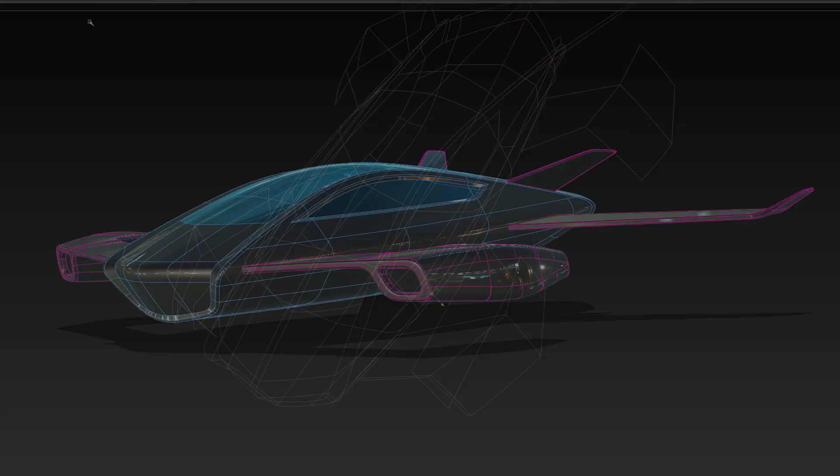This is part 2 of the spaceship. I broke it up into 2 parts because this second part is a little mini version of what I did to make the first initial form.

So as you see here, I'm doing the same thing I did last time. I'm developing a curve network to help me figure out how that turbine is going to look, and what type of proportions I'll have. Actually, before this, I had another video where I tried another method.

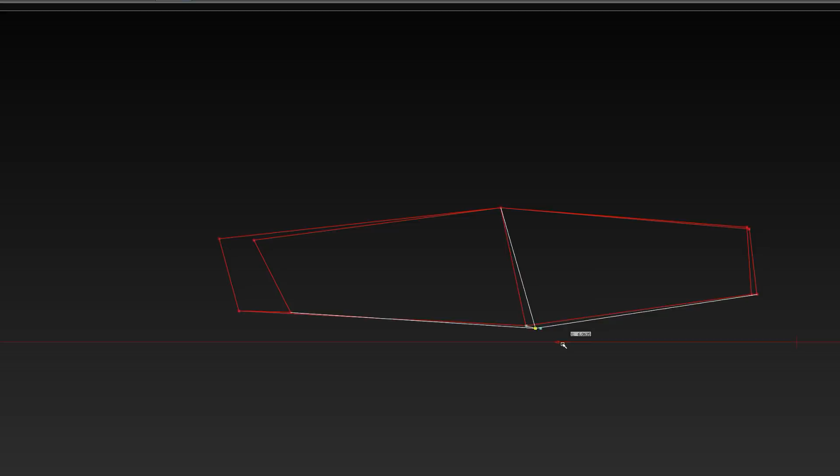Trying to build these turbines off of those wheel wells, I didn't really like just straight up surfacing it, it was kind of confusing me. It reminds me that every time I veer off my method, I always end up going back to how I'm comfortable modeling.

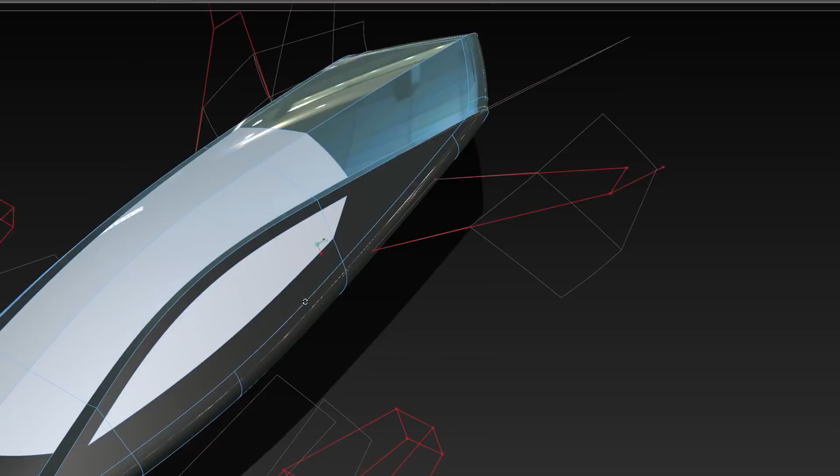Obviously we all have different ways of approaching this. I always try to tell people, because I've seen people model beautiful things in completely different methods, that if you find more comfort doing it another way, it's fine, as long as the result is really controlled.

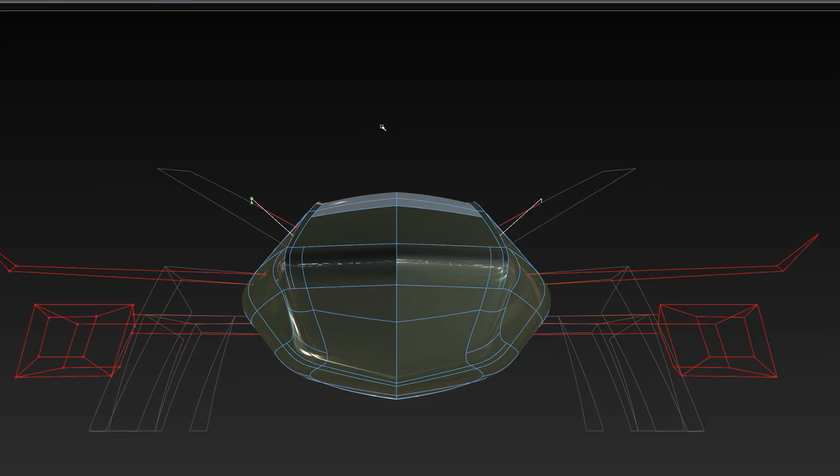It doesn't matter how much twist it has or anything like that. It matters more that you decided where to twist it and what type of volumes you wanted. If you have a better technique than mine, make a video and link it to me. My point is I don't think this is the best method, just my method, something I feel comfortable doing, and it's been really helpful in my career.

So just remember, I don't really like... sometimes I hear people, especially in my career, when guys were teaching me their ways, a lot of times people get a little too egotistical in that sense.

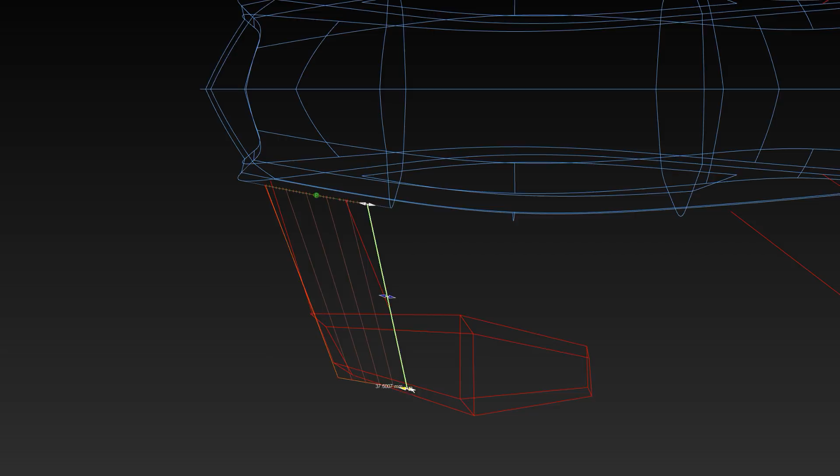They're always like, oh, you have to do it like that, you have to do it like this. I know I might have even sounded like that in my videos, but I want to make it clear that it's not so much about my own method. It's more about trying to tell you guys about control.

That's why I always tell you there are millions of different tools and techniques, because just don't be lazy about how you're modeling. Make sure that whatever technique you're using, you have ultimate control over it.

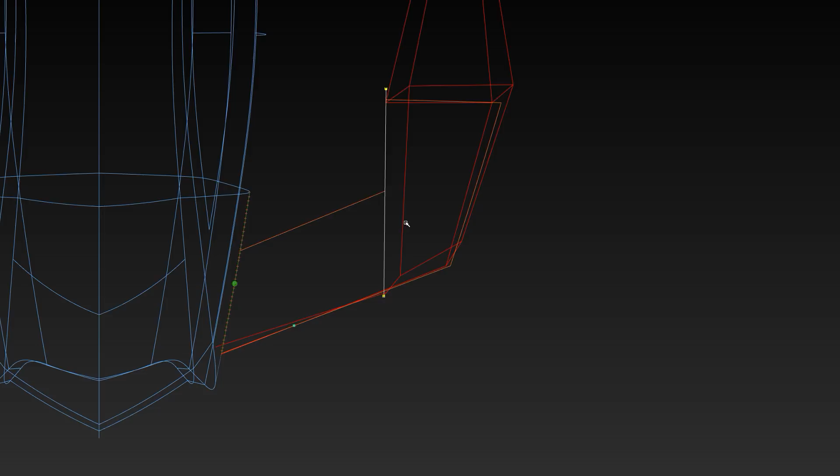My technique is a certain... I don't know, I think you would call it box modeling, or back in the day they used to call it the European method, because it used to be very... before Americans didn't... I don't know, that was before my era.

I will say this technique isn't mine or anything new. It's just something I learned through different coworkers, and it's something I really enjoyed. It's helped me with the companies I worked for, they really liked my results, and my clients like my results too. So in the end, it's all about control.

So here I'm going to slow it down so we can see. While I was modeling it, here's me kind of rotating it around and seeing if I like the design. Again, remember from the previous video, these are all just suggestions to help me figure out how those surfaces are going to be surfaced.

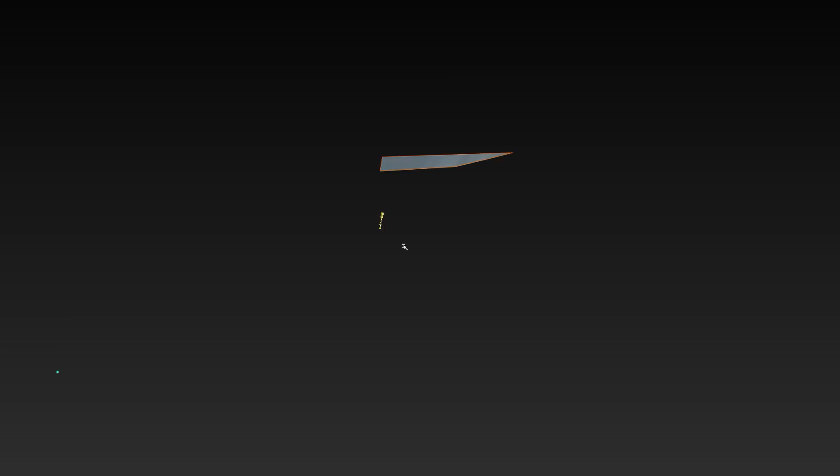Okay, so now I actually start surfacing it. The first thing I do is add a curve on surface using the insert tool, then duplicate it using the duplicate curve tool, and then skin those two together. That's how I extract a surface from my wing.

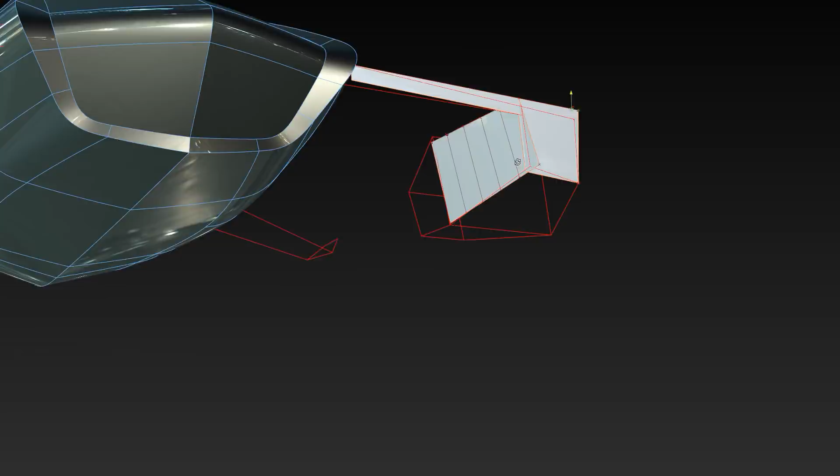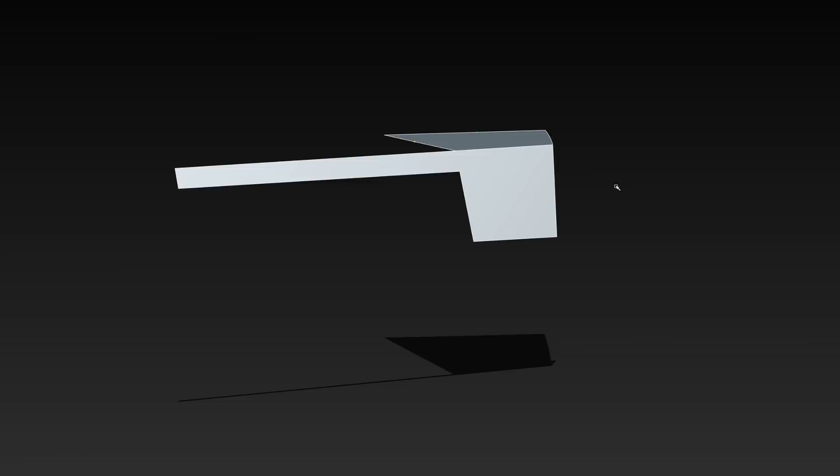From there I go to the top view and extend everything back to get the profile I wanted. Again, this is me trying to find a solid base before doing all the extra stuff I want to do. I extend that plane all the way back, even though I know there's going to be an elevation change later, which you'll see in the design. At this point I had that idea anyway, but I still needed a very solid base to start with.

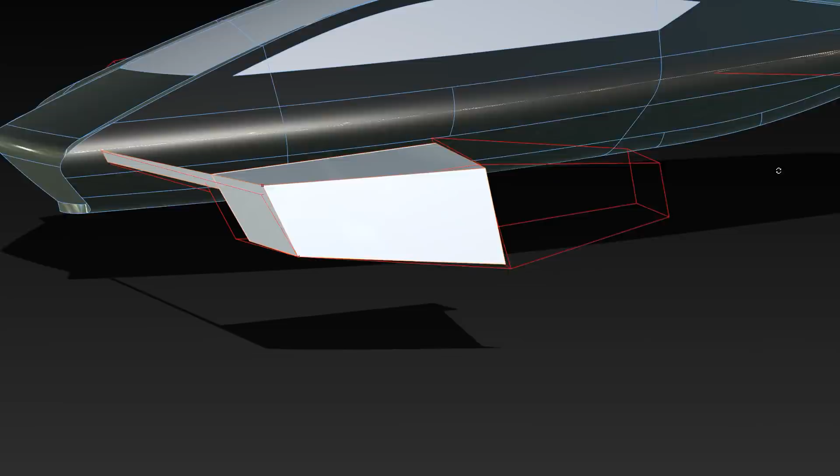Once I have that solid plane, I project the curves and trim them, and this gives me a nice top surface to work with. Now I want to make the front of that turbine, so I use my rail tool to get a nice straight surface right there.

As you see here, I start to add the main surface, and then I start adding the curve on surfaces using my insert tool. I always use the insert curve on surface command because it inserts a curve based on the actual surface's properties, giving you a really nice, clean, balanced cut.

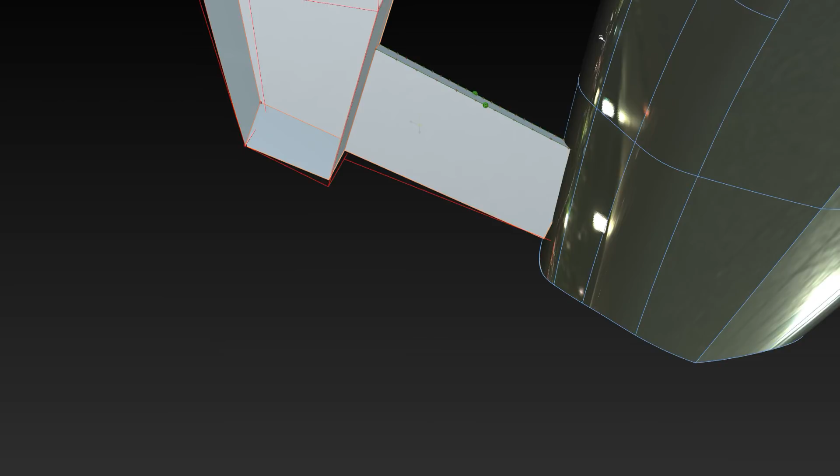But obviously, when the angles are too different, you could use a curve or something else to make that cut. Here, I'm extending the curve on surface to get that corner, and then I duplicate that edge, and then duplicate that curve and place it back on that edge, and then skin it.

Even though I know that seemed a little complicated, there's probably easier ways to do it. I was kind of just going almost like a robot mode, trying to surface this as quickly as possible.

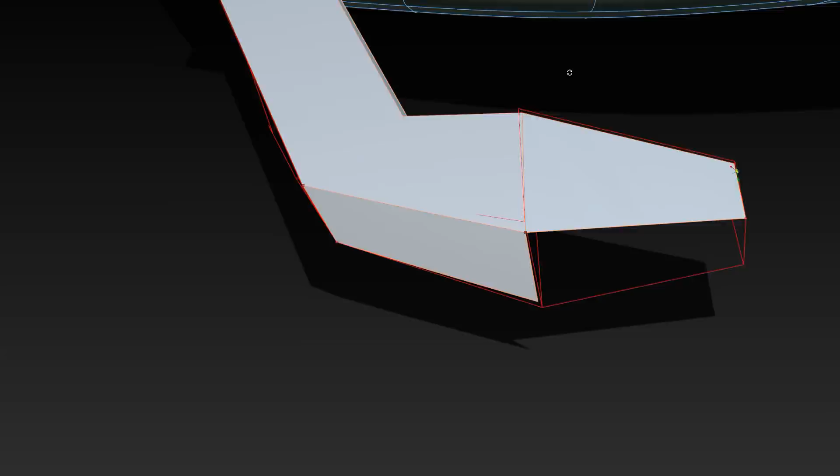Using proper theory. And the speed I'm doing this at, it's actually fairly confusing, honestly - just making those structures in space and trying to figure out what angle is gonna hit it, and doing a bunch of untrimming, retrimming.

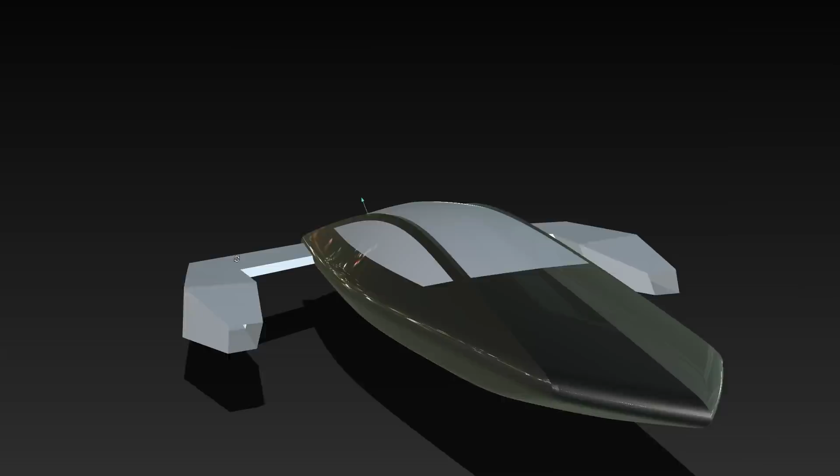Whenever I'm up against these sort of projects or this sort of workflow, I go through it in my head, even though it's happening kind of quickly while I'm actually doing it. I just try to go as simple as possible.

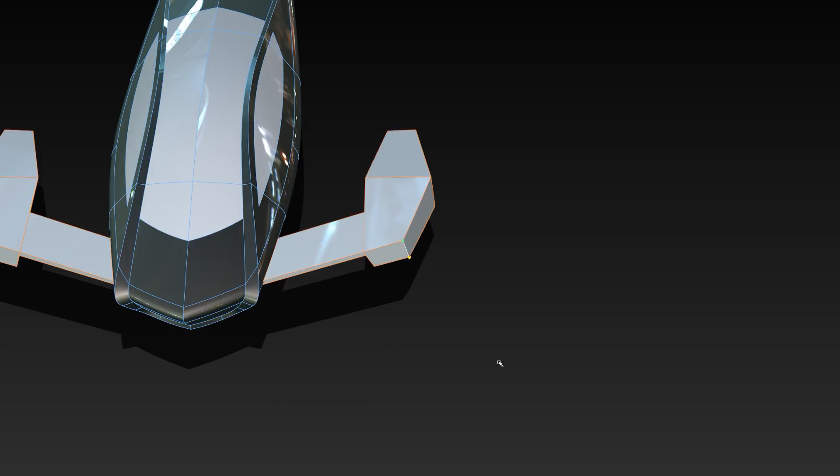Here I'm just railing it. I'm like, okay, let's just rail this, and I know I have to do that because if you start thinking of it in bigger terms, you almost get overwhelmed - it's kind of difficult to figure out that whole structure in your head.

So here now I have a base, and if you see me just browsing around, I'm thinking, okay, what should I do? I'm trying to develop the underside of that connecting arm, and I'm always trying to find a way to use the surfaces to complete the other surfaces.

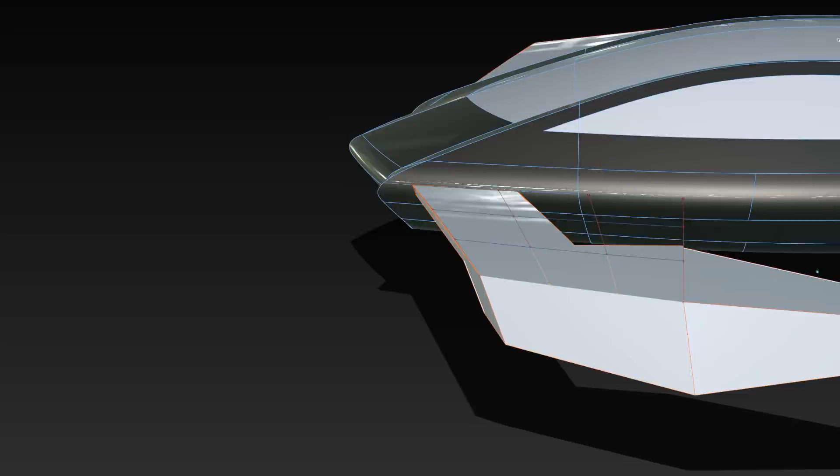So I insert a curve on surface in that slab, and then I rail it using the profile of the other slab. Now I extend it back to match the profile that I wanted.

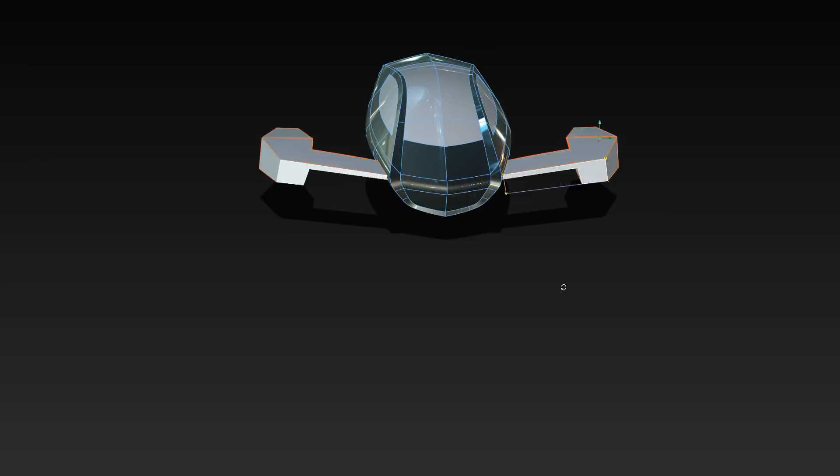If you notice, especially when I'm working on things that are a bit more technical, like this turbine, I'm keeping everything really straight and adding no volume yet, because I'm trying to figure things out first - even though I know it's going to cause me more work later when I'm adding volumes everywhere and realigning everything.

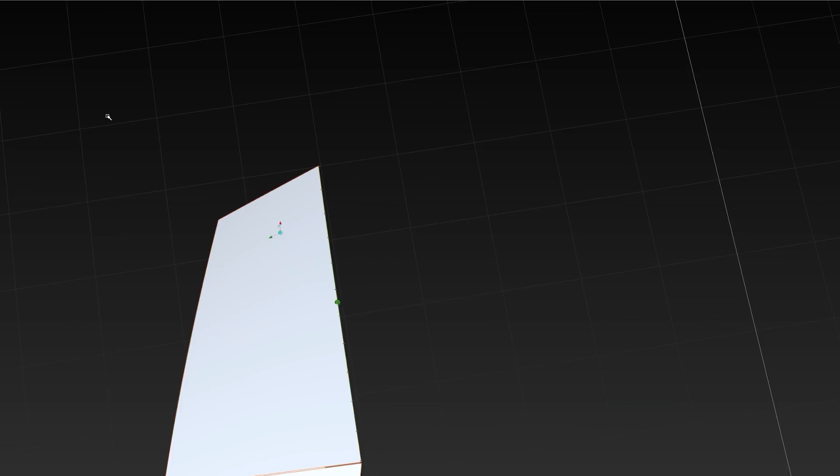But it's a bit confusing, so I'm just trying to get the simplest squared-up form I can get. And here I kind of accomplished that. Now that you have this surfaced up and built, it looks simpler.

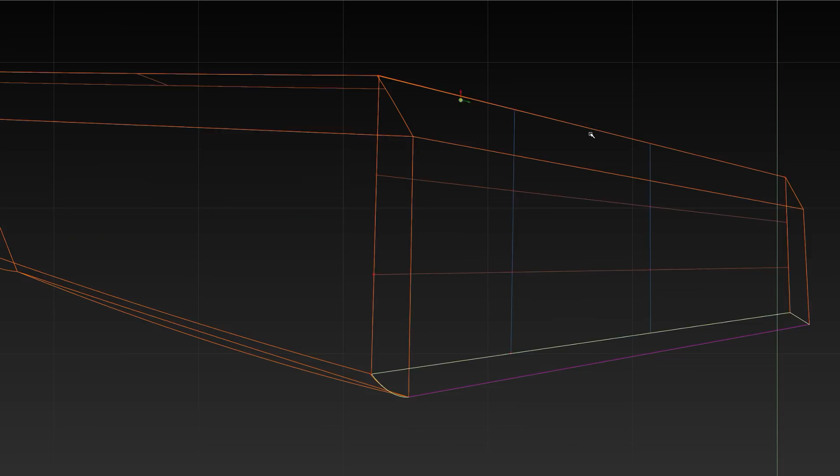It's like, oh yeah, that makes sense. But it looks like that now, and as you saw how we were building it, it's confusing just to get this part down. So don't be too discouraged when you're confused, because I've been doing this all my life, and it's not that I'm not confused, it's always a difficult puzzle to solve.

That's another thing about when I see these videos - they're teaching you the final result, not how they actually got there. So now that I'm actually happy with this form, I'm going to start adding volume to it.

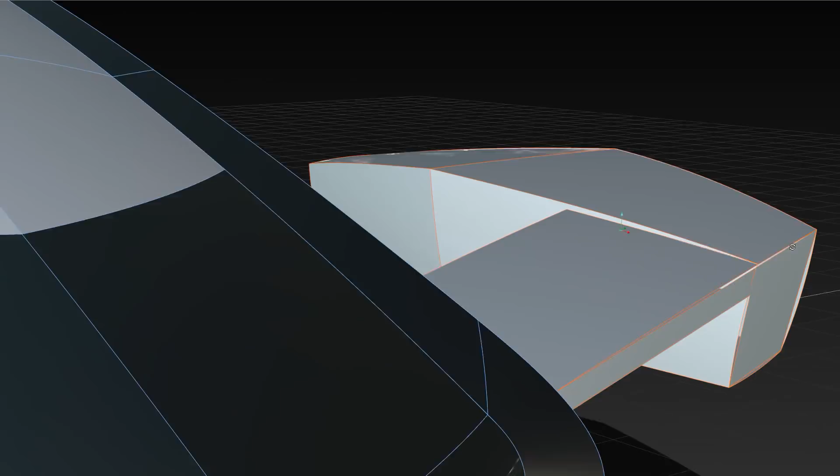I don't know if you remember in the first video, part one, when I was doing the curve network, I talked about how I use the same theory throughout my whole process. Before I was using it for curves, right? Like finding the curve in space and then adding the volume. This is the same exact thought process, but adding one more dimension to it with the surfaces.

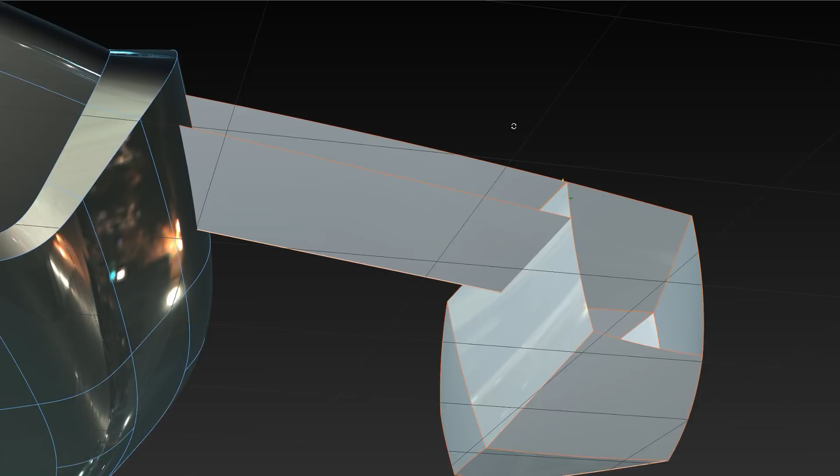First I found this very boxed up primitive form, and now I'm going to start adding the volumes everywhere. This is going to cause a lot of work in general, because since I know it's closed up, every time I add volume to one side, I know that I'm opening up another, and I have to figure out how to add volume to that. I have to add volume to all of them. It might seem repetitive, but honestly, to me, it's just how you get ultimate control over everything.

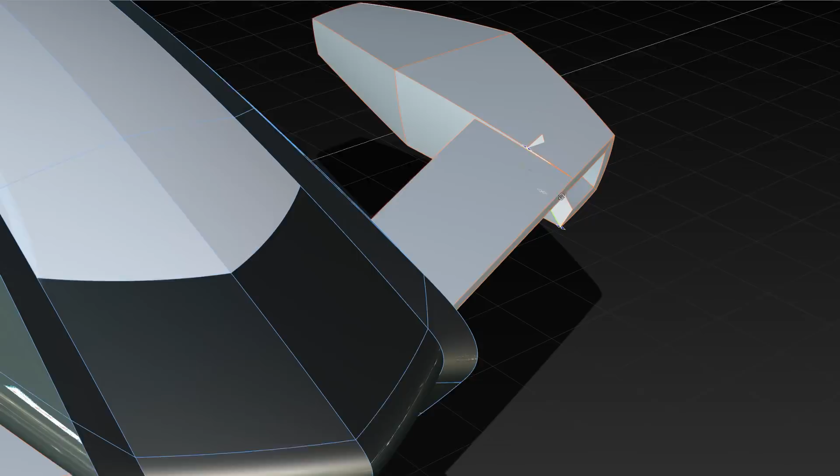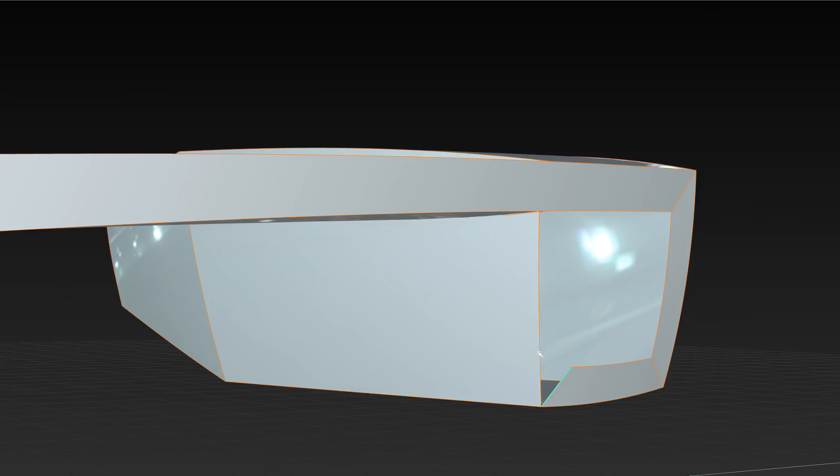Before I was a NURB modeler, I was also a polygon modeler. I personally love polygon modeling, but it doesn't give you this sort of control. Even with all the new solutions coming out, like T-spline based solutions, Speedform and stuff like that, what happens is they make it easier for people to make sort of round organic shapes, but they lack any real control. So to me, they're not really. Every time I'm testing these softwares, they never have the same control that NURB modeling has in general.

That's always NURB modeling, it's the way you can find ultimate fidelity in your models. It's not only Alias, there's other solutions. But when you compare it to polygon modeling or anything like that, yeah, this does seem like a slower method, but nothing is going to give you as much control.

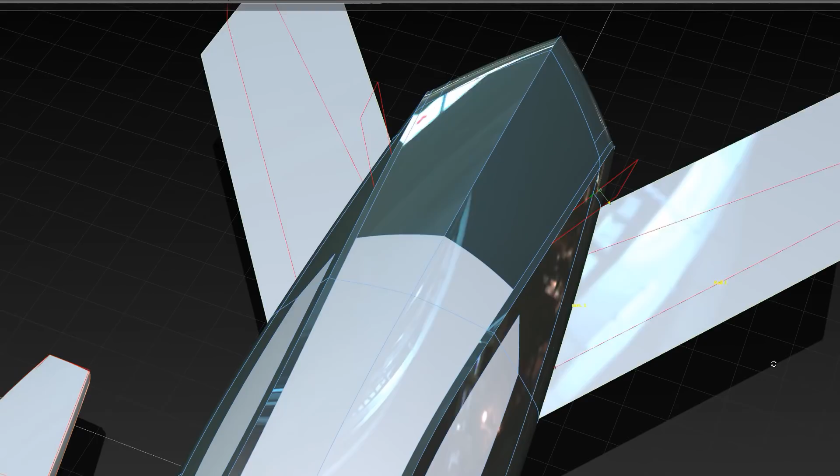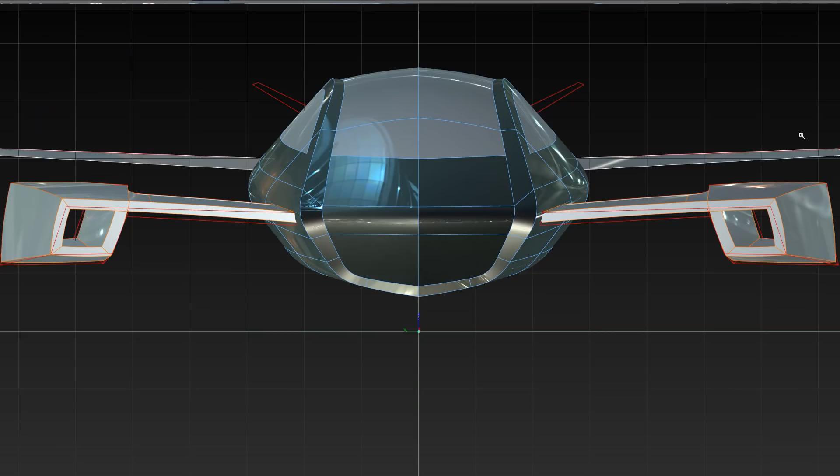If there was anything that could give you more control, one, I would love to see it, and secondly, I would move over to it, because I'm not evangelical for NURB modeling, I'm evangelical for great surface and modeling control. So if there's a new method, I'll definitely look it up. But so far, that's the reason why automotive design studios use it, and why high-end product firms use it too.

So focusing back on the model, it's all kind of been the same. The only thing that's been a little different is I railed that edge of the turbine across. Actually, I was planning on having that turbine, after it turns, go back, sort of like how I'm doing it there. But then later I got bored of it, I didn't like how it looked. It kind of looked weak, seeing how it doesn't really look good.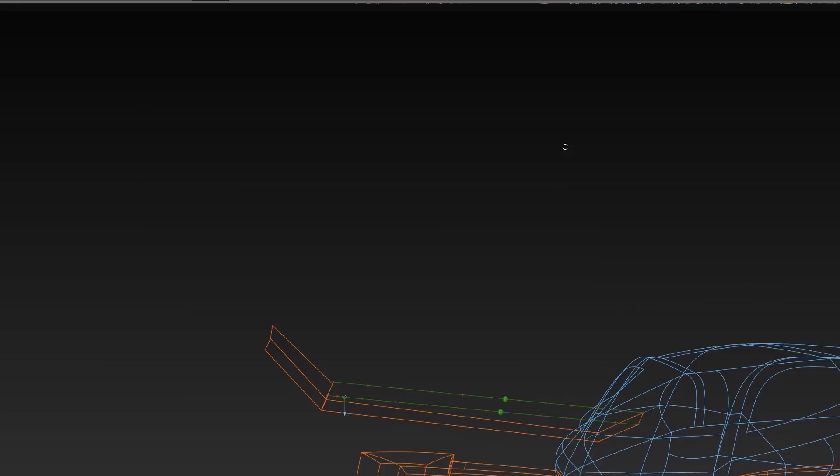So I actually go back to using one main slab for those surfaces. Here I'm using the same method I used, if you guys had seen my Electro video, where I use the railing tool to develop the edge of a surface. Later in the video, you're going to see that I use one surface instead. But there's pros and cons to all that, right? If you use one surface, you can't really change those angles. And even though in the front I do that, in the back you'll see how I use more this method.

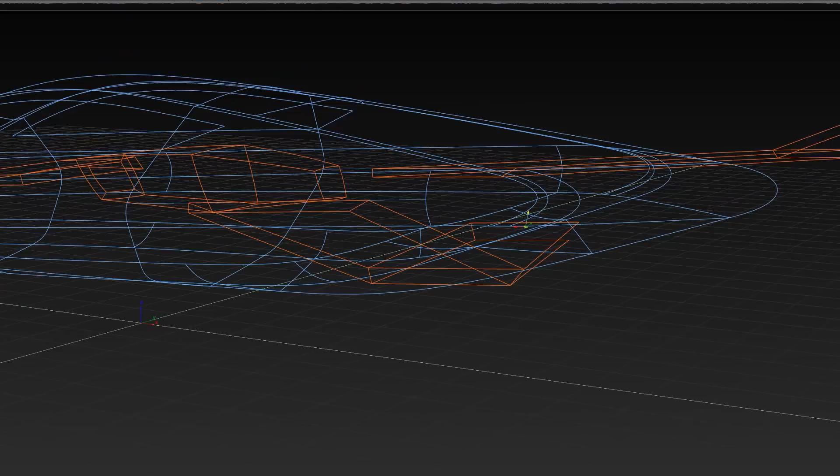Here I'm just trimming it, and then I'm using my freeform blend, and then the side I make it positional, because when I added different volumes to the connector and to the turbine, I knew I wanted this little light catcher.

Once I had the volumes boxed in for the turbine, I went for the rear wing. So here I insert a curve on surface, and then I align that curve I made to it, and then I just do a simple rail. And then I go into the top view and I project the curves I initially wanted, and then I use the trim convert tool to get me that surface.

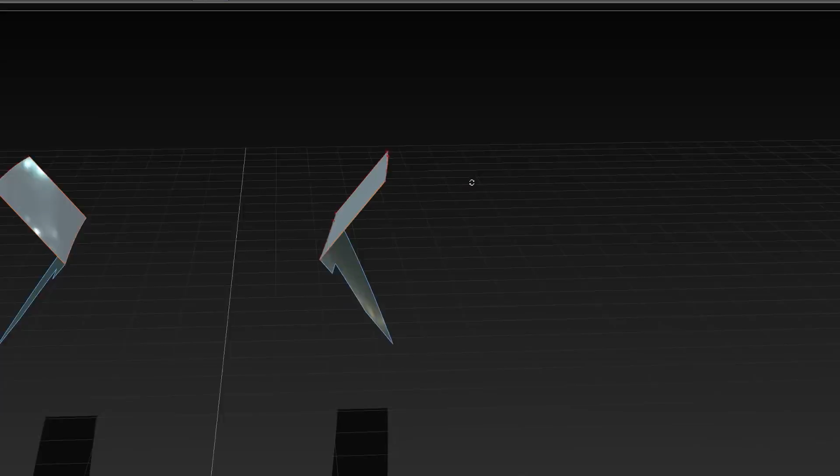So I've been doing that through the whole video. If you slow it down and see how I did the rest of the wings, that's basically, to me, the easiest way to do it.

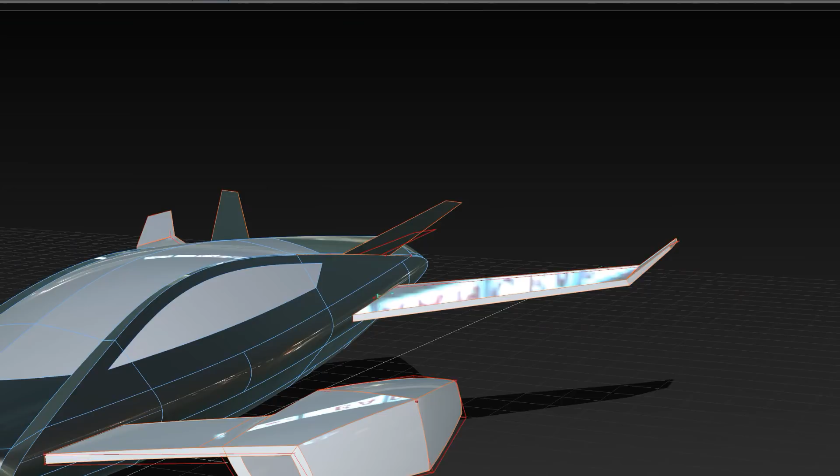Then I control copy paste the lower surface, and for the top little tip I do the same things I've been doing, just to get that curve and rail it across, extend back to the character I wanted. See, now you can see the amount of twisting I prevented by doing that. This gives me a nice little base to start the rest of my wing. I skin those two together.

So from here, I'm gonna use the rail tool to make the second side of that tip. I just extend it to get the angle I want, and extend out the bottom surface to match it. Then from the top view, I sort of box up the back of it.

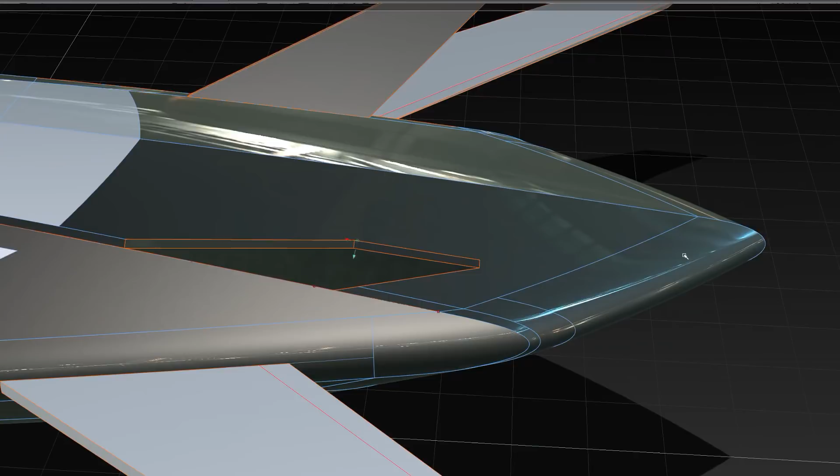This is the same philosophy I've been using through the whole video, honestly. I rail it, and once I actually see how it's relating with everything else, I think towards the end it looks a little too blocky. So this is nice and boxed up, but I'm like, okay, this is too blocky, and I decide to make this taper more.

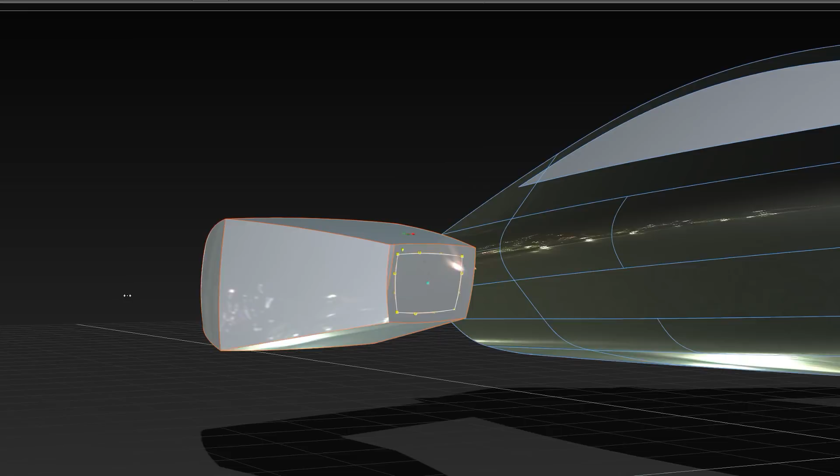So now I use that surface to give me that nice straight taper I want. Then I align it up, and surface the rest of it. This gives me the rear wings, done really quickly. I think that was maybe 3-4 minutes for this sort of wing tips.

I duplicate that trimmed up edge, and simplify the curve a bit, and control copy and paste and move that to the angle I think I want, and then I just skin them. Then I just quickly color it, and here it looks kind of funny.

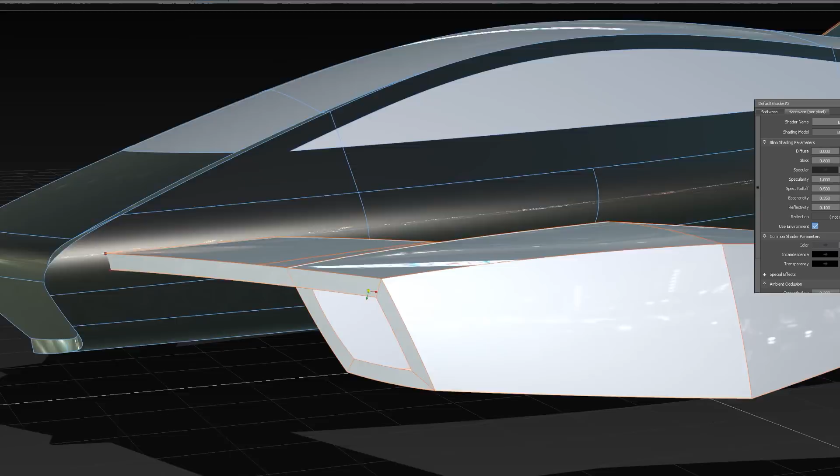I'm gonna use this previous curves as a guide, like I've been doing. And obviously, now that I saw it with an actual surface and the rest of the proportions of the vehicle, I figured bigger wings looked a lot more stable. But honestly, I'm pretty sure this is like terrible wing design, obviously.

So we're gonna control copy and make the other side of the surface, align it to the edge, and then just skin everything together. And there you go, now we have that nice little wing.

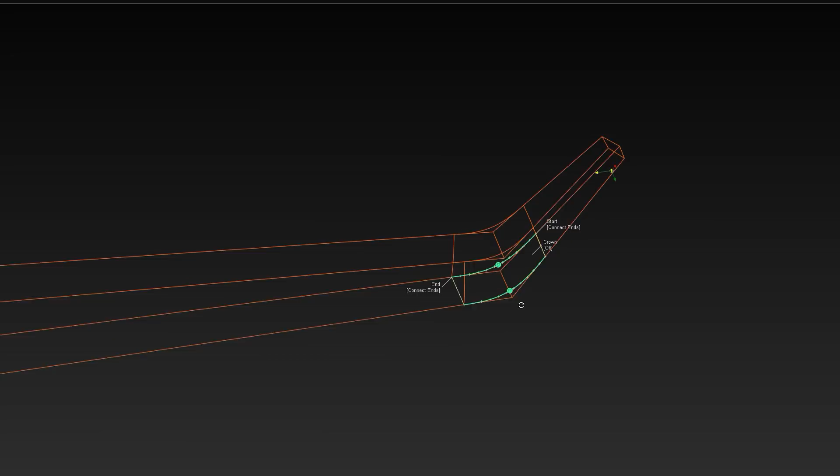I didn't like that angle from the side, so I just extend it back, extend the rest of the surfaces back, and there you go. See, to me, once you start seeing volumes like this, it's just the building blocks, and you could go anywhere with it, knowing you'll have a nice solid foundation.

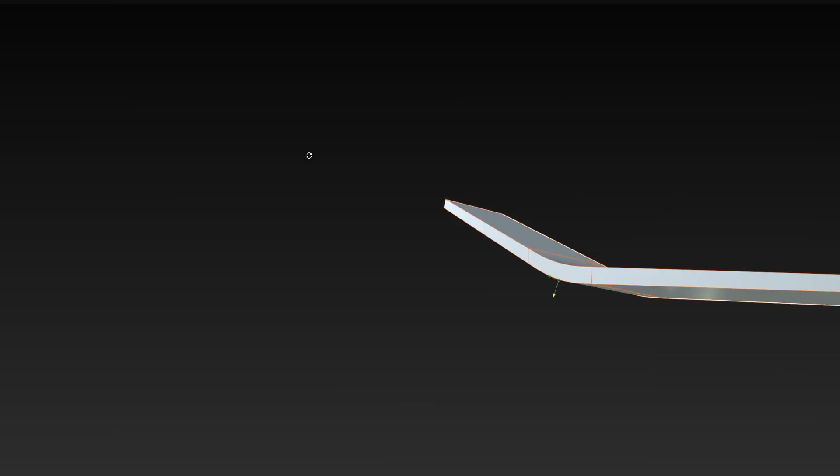Here I just control copy, because I wanted to angle in, so I duplicate those edges, copy them, group them, scale them, and move them a little back, and now I'm gonna skin them. So I'm getting closer to finishing off the main volumes, or the primary surfaces of this form, and I'm gonna start doing all the fillets and stuff.

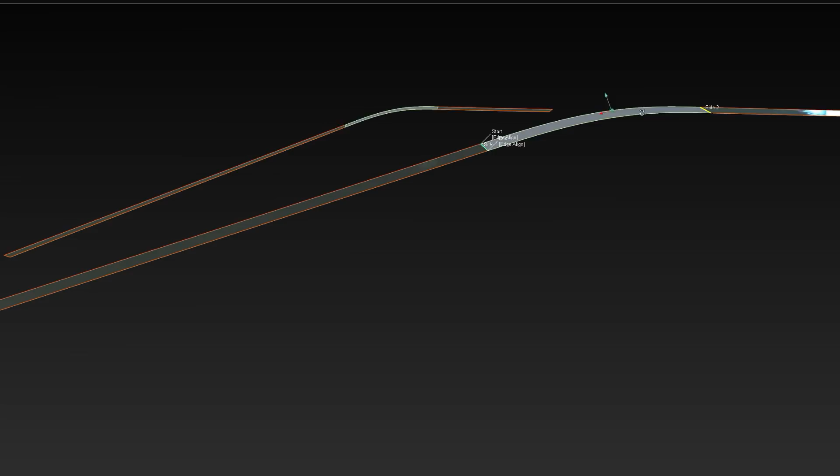From the side, I control copy, paste, and add a little ledge there for the turbine. I wish I had the time to really keep going with this spaceship, but I don't think it's really worth it. It was a really fun project though.

Here I'm just doing the whole of the turbine. And also, once you really start adding the details in these spaceships, that's when the love starts coming out.

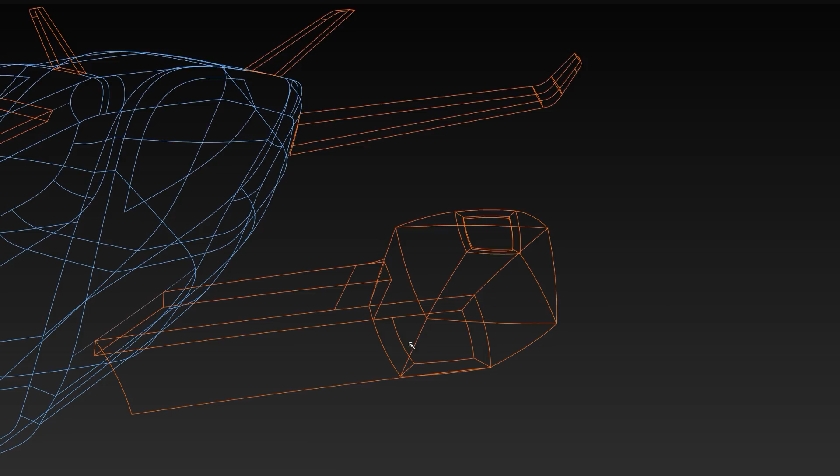Now I'm trying to figure out what to do first, and I'm gonna go for the easier targets, the rear wings, to start surfacing up the secondary surfaces, the transitional surfaces. Because I know the front turbine is gonna take me the longest, I'd rather get the rear wings out of the way. So I just use the fillet tool on this corner with like 50 millimeters of radius.

Then I do the other side, and I think I skin them together. Oh no, first I do - yeah, there you go, I skin them together, and then I use my project align, which is inside the align tool. There's a project command to align that skin and give it curvature.

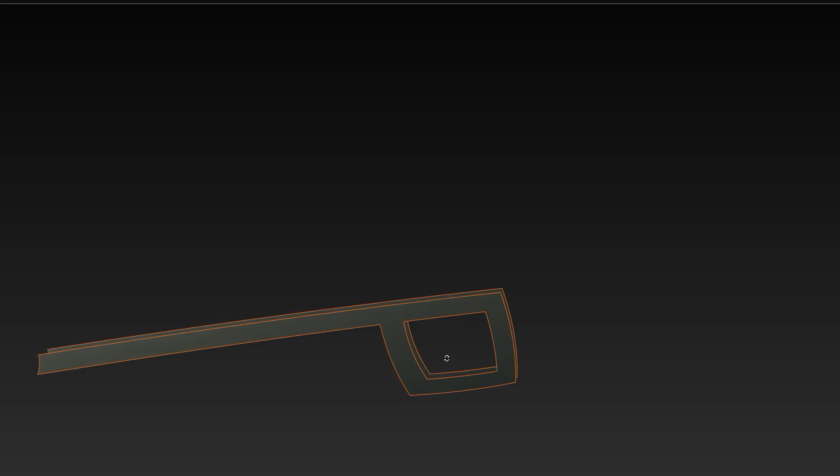Obviously, like you saw in the other video, you could definitely use whatever method comes to your head. That gives me a nice little bend in the wing. Now I gotta make the top of the wing a little rounder. So I insert a curve on surface, insert curve on surface, trim, and then freeform blend. See?

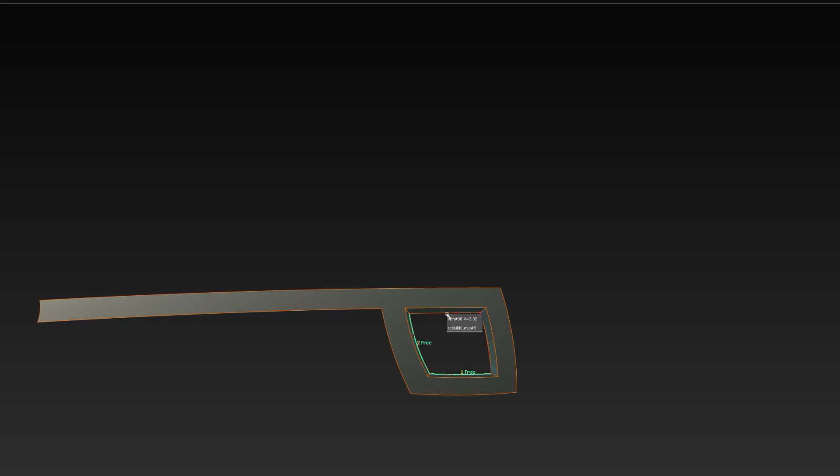Honestly, it's so repetitive at this point. Well, I guess you could say if it ain't broke, don't fix it. But it also gives my designs a certain look to it, you know — they're always very structured.

Here I'm just trying to figure out where to go with it. I started making the roundness of that interior still very free flowing, not taking it too seriously. Honestly, this is a casual weekend thing.

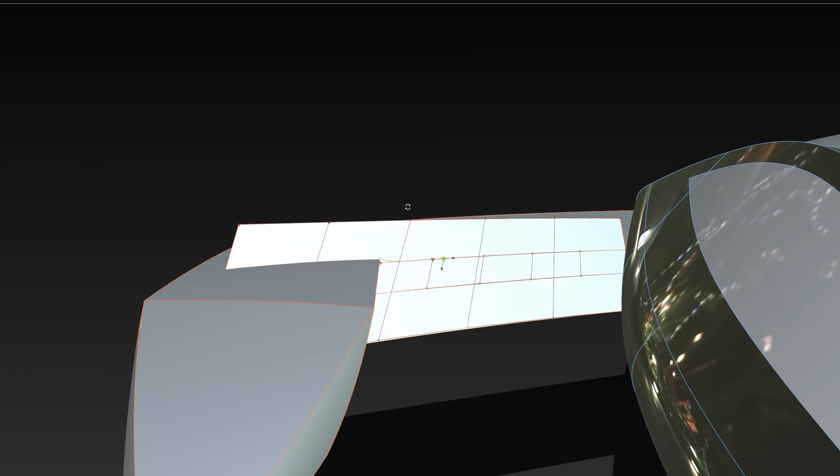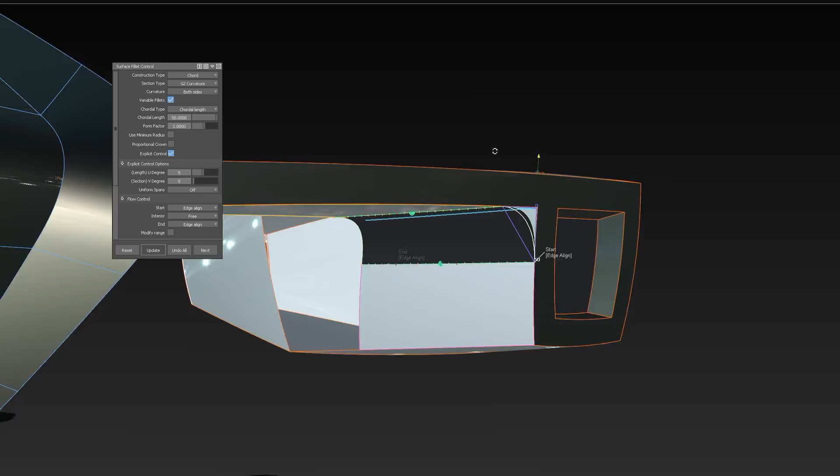So before I move on to the little fillets of those edges, I decide to go back to the turbine to try to surface it up, the secondary surfaces, and I redo this front edge because I realized I don't want that bend back anymore, so it's easier if I just use one surface for the whole front edge. As you see here, I put the previous stuff in a layer instead of deleting it, then I realize I still need it, so I open it up again and project it to the new surface.

I mention that because I always have a layer where I put all my deleted surfaces, because especially when you're really in the zone, you'll sometimes accidentally delete stuff, and I always go back to that layer to find those surfaces I deleted.

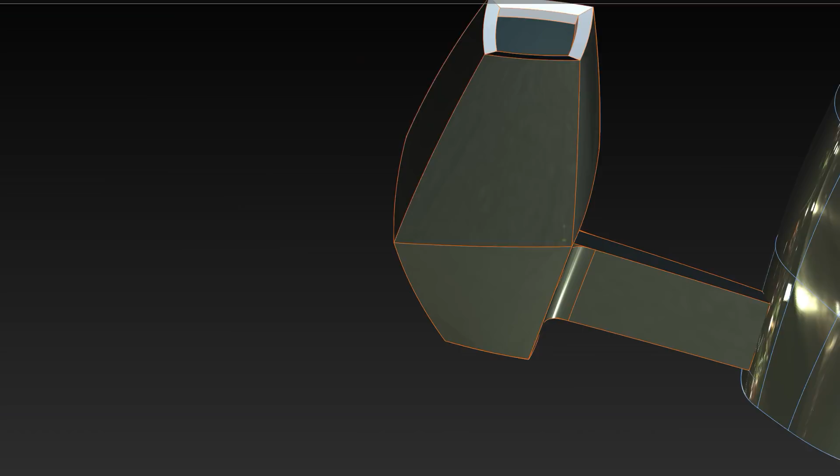Here I just duplicated it back, then duplicated the surface and moved it back, then duplicated the edges of that hole, simplified the curves, and now I'm grouping them and skinning them to the front of this surface.

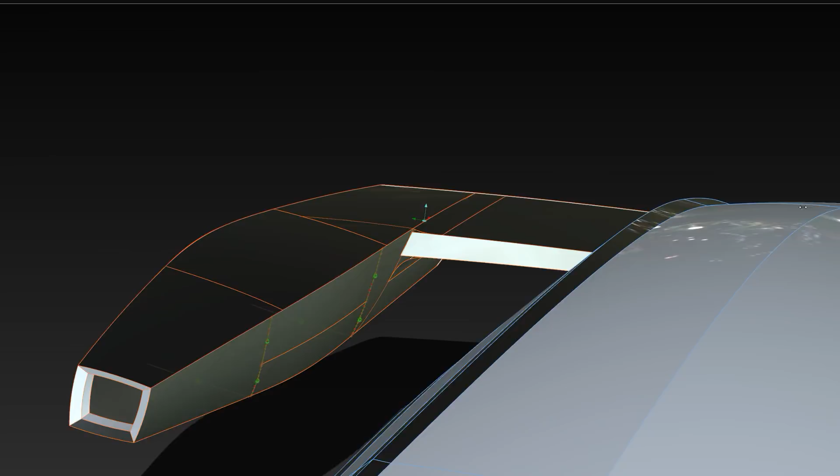Now I'm adding a square, and that gives me this front hole. Now I know I have to realign everything to this new surface, so I have to untrim and align — it's part of the process almost, you know.

Okay, so here it gets really tricky, so I'm going to try to explain what's going on. I know that I want to do the underside fillet of this connecting arm, so I need to cut up those surfaces to my left to help out my fillet tool.

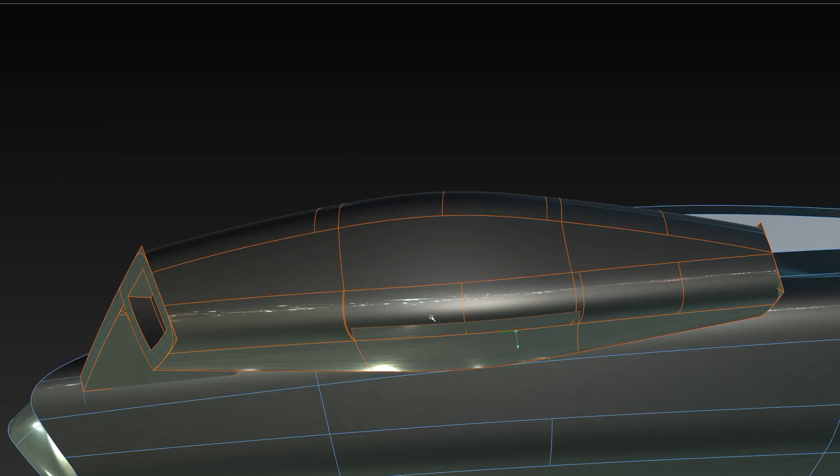So I control copy and paste, duplicate that surface and the edge so I can find out what that intersection is, and then use the intersect tool to make those curves on surfaces, then extend and trim these just for the next point of this process, which is the fillet I was trying to make.

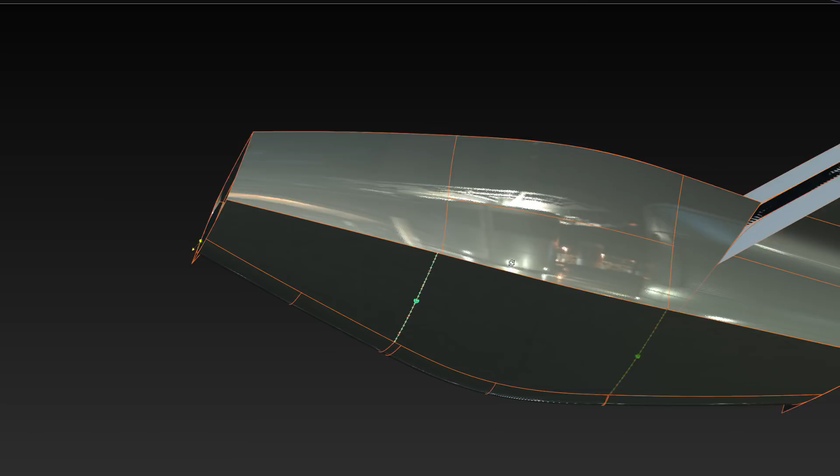And then you'll see here that I realized I forgot to align it, so I take out that fillet, realign it, and then add that fillet again.

This is all me slowly adding all the secondary fillets, trying to make it as easy as possible for Alias to process, and also easier for my head too, because it's really easy to get confused on what is going on. So you have to slowly go at it, you know.

Once I do that, I realize I need the transitional surfaces on the edge first, and there I'm just using a regular fillet tool for that corner in particular.

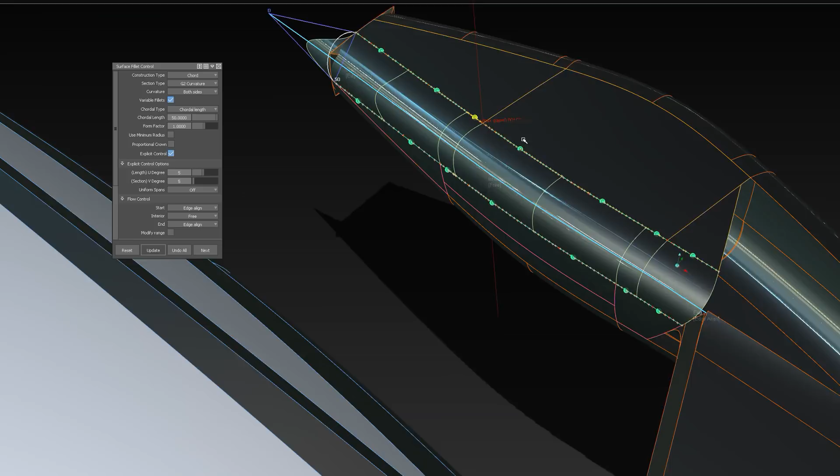Now that I added those big fillets, it really starts to make that form shine. I could have used other ways to make all those edges connect to each other, but at this point I thought the solutions the fillet tool did automatically were good enough.

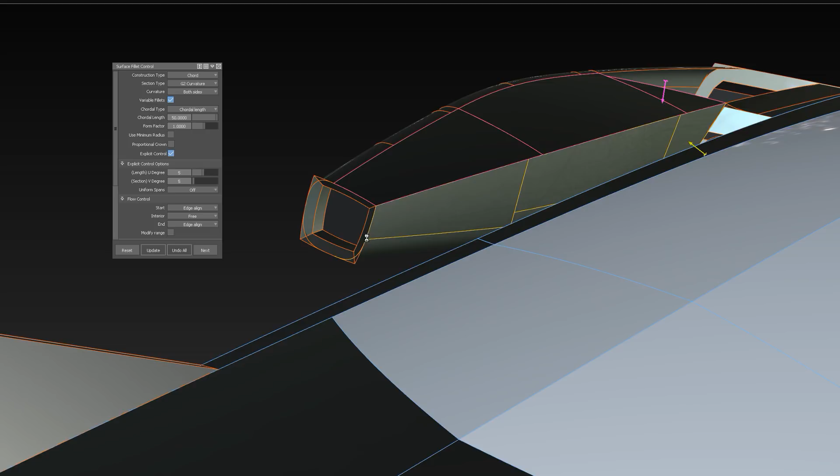Here I'm just coloring everything up to make it easier to understand. I'm always doing this sort of cleaning up as I go to help me. Then here I add the secondary fillet into that turbine.

And see, like, once you add those fillets, now that really starts to make everything a lot cleaner and nice looking.

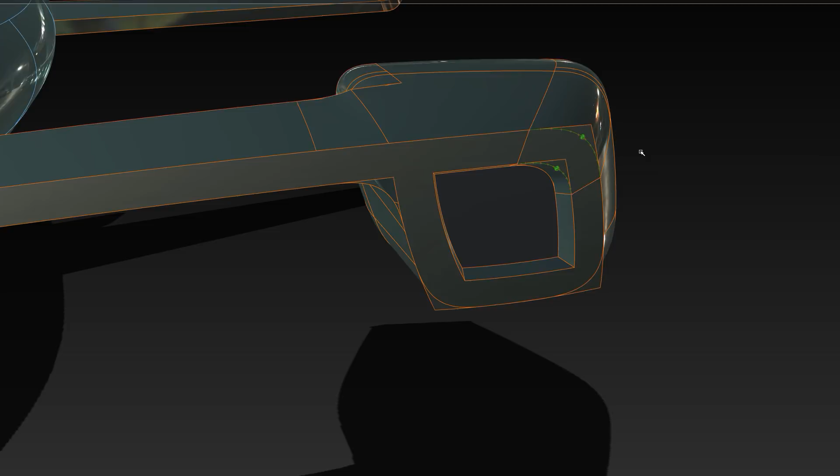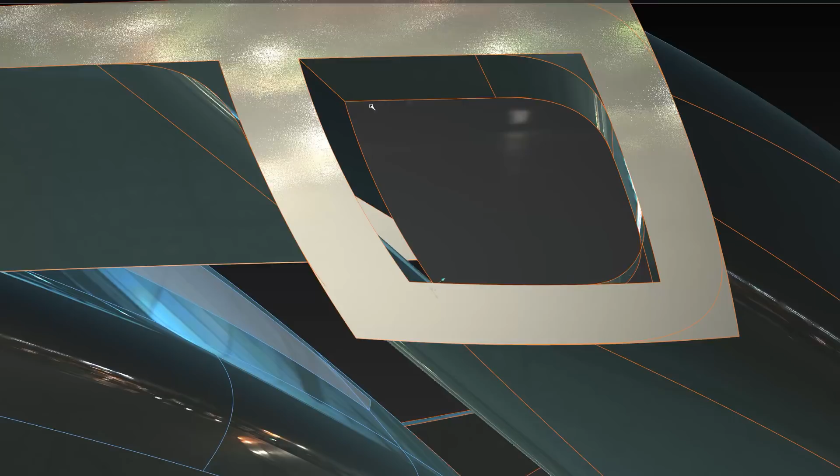For some reason the fillet tool isn't trimming properly, so I'm just deleting the last one, extending it out, and trimming it again. Honestly, if this was more of a project inside a studio, I would go back and focus a little more on this section, but right now I'm trying to accomplish everything in less than 4 or 5 hours, so I'm a bit looser with it. Here I'm just doing edge to edge, doing it one by one as opposed to going through all of it. If you do that, remember to double check the edges of those fillets so that they're positional. I don't in this particular example, but it's fine.

Oh Lord, am I bored? No, I'm joking, I'm only kind of bored. I'm trying to do that. I feel like by now I've lost everybody. There's no way someone's still watching this YouTube video. No way, I doubt it.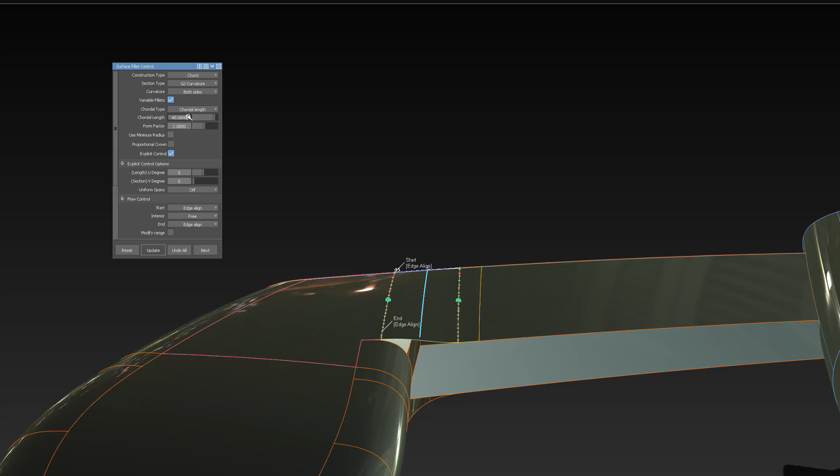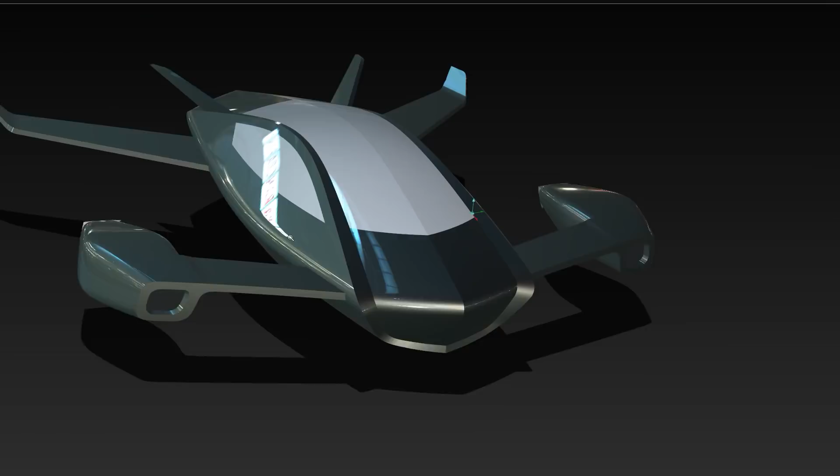So now I'm going to expose my deep, dark secrets. Sometimes I move around the fillets to make my job easier. So at that edge, if I hit 50, the fillet was reaching the corner of the other fillet, and it was making it do that edge line. So instead of doing that, what I did is I just made that edge a little smaller so it doesn't hit that secondary fillet, and that made this job in particular a lot easier. See, if I just kind of reach the corners as opposed to them reaching itself. I do that a lot, honestly. A lot of times the easier surfacing solution is also the better looking one.

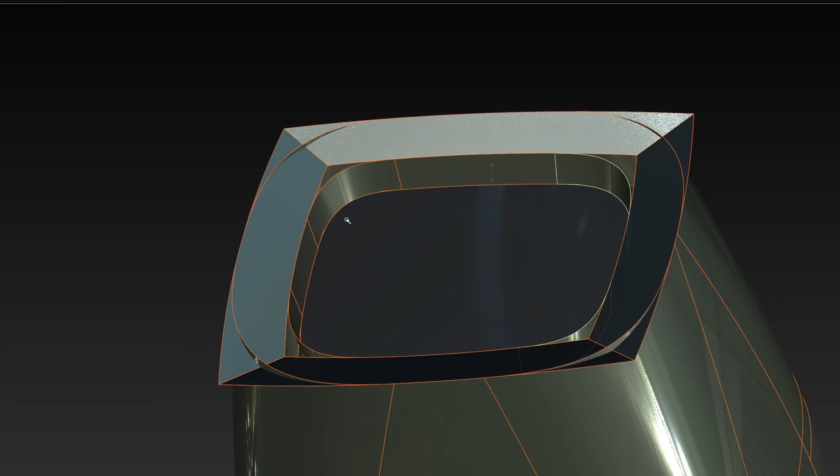So now I'm just trying to figure out how I'm gonna do all these different areas. Here I'm doing the things I've been doing for the past - through this whole project - insert curve on surface, freeform blend, and then I'm skinning the sides. I actually did the skin on, like, I wasn't supposed to do it because I already had that regular surface, so there was no point, but I guess it was just habit. See? Easy.

This doesn't give you an accurate chordal distance or anything like that, but it really depends on what look you're going for. It doesn't always have to be an exact distance between one side or the other, especially when we're talking about little holes like this.

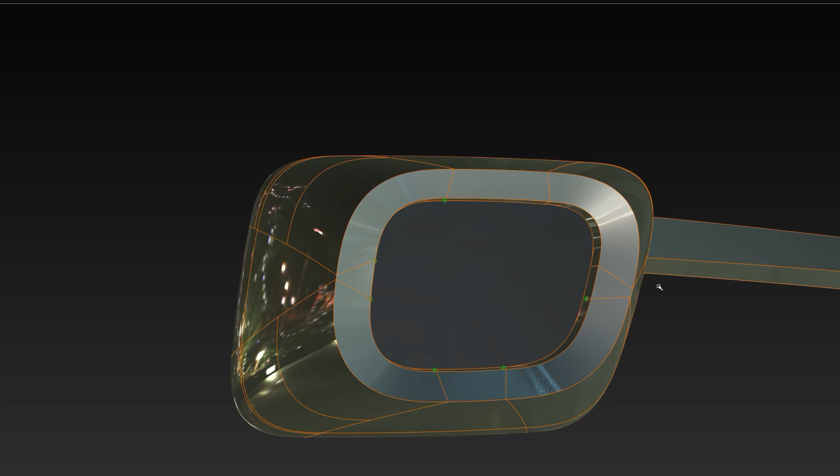And so see, now when I untrim it, since I did everything very slowly, now we have this nice little profile that I can use to trim, to project and trim all this face. And then I accidentally get the curve on the back, but then I just delete it, and there, now I have the face.

Honestly, back here, I could have done a lot more with it, in terms of the transitions and making everything smoother, but I didn't really want to spend more time on this particular project, especially now that we're getting so close to the end. After this, all it is are just the really small fillets here and there, closing it up. Like you'll see here, I'll just extend everything out.

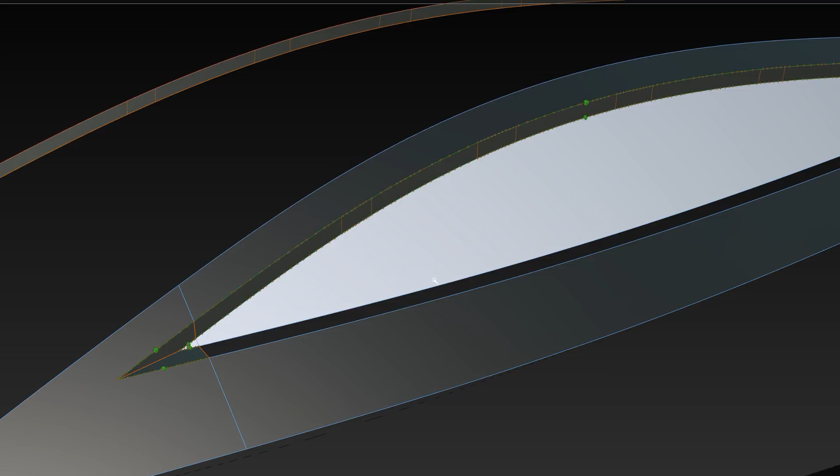And I wonder if I even attempted it, or did I just kind of leave it like that? Because right now I'm analyzing the model that I finished it with, and then I realized that maybe that edge doesn't have anything.

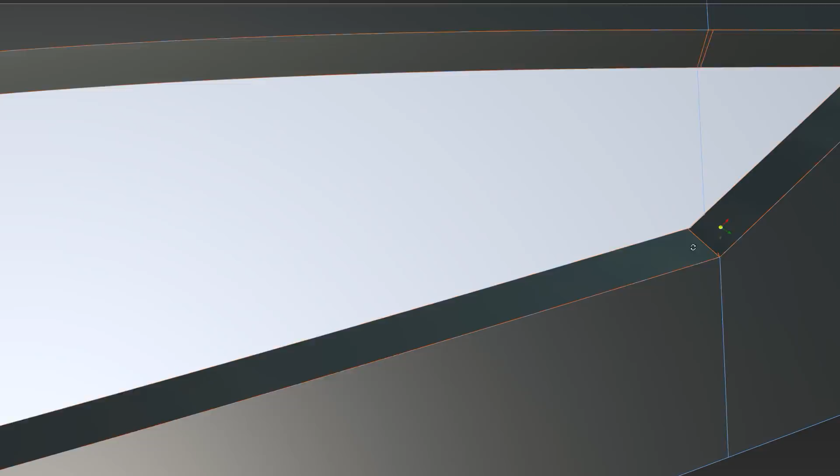Now I'm doing the back of this turbine, and as you can see, remember in the front I did that insert, and here in the back I'm just doing a fillet. That just kind of goes to show you that it doesn't really matter to me - whatever I think of first, I just do it.

And then I isolate all the fillets, and then I skin them together. And then now I'm gonna - oh, since I saw them like that, I thought they were a little too small, the inside fillets, so I make them bigger because they had history.

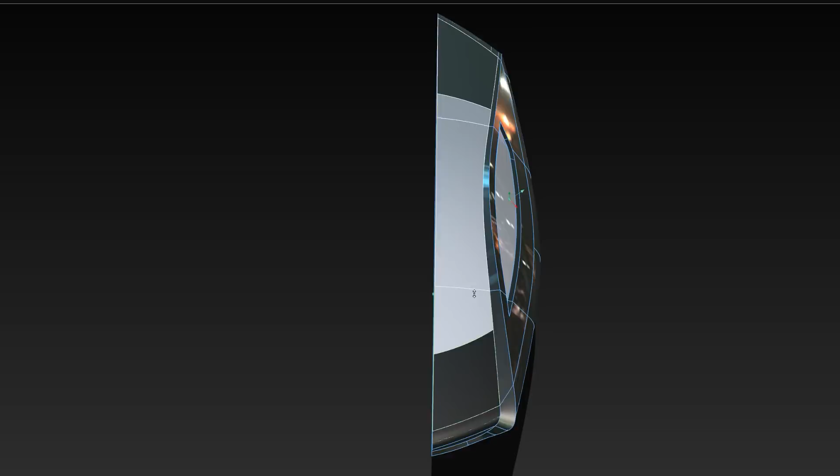And then now I'm gonna probably project align all those to its corresponding edge. As you can see here, I'm only using tangent align, and that's because since everything's already so structured, it kind of is already curvature. Like the other ones, I did do curvature, but if I double check all those, since they're all based off each other, most of the time it'll already be curvature.

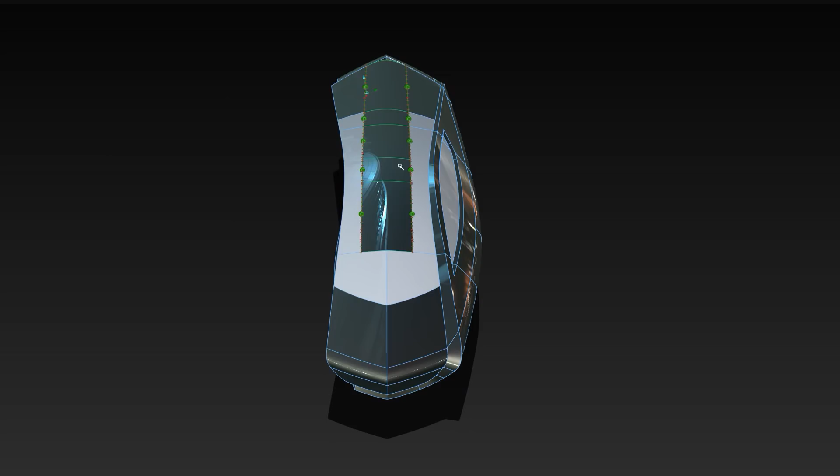Now I'm trying to do the window of this, so all I do is just move it in. If I wanted to be more precise, I would have used the offset tool, but I didn't. Now I'm using the tubular offset tool to give me a bevel in those edges, and this gives me a nice inward bevel to those edges.

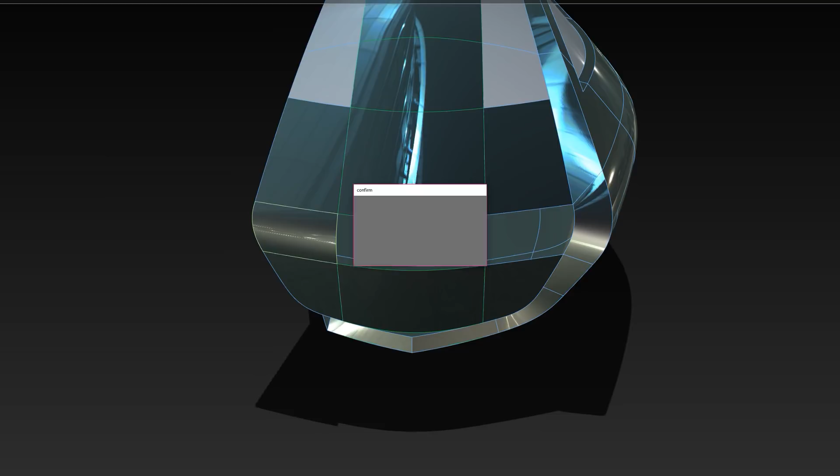And then if you see here, all I do is just skin them. Usually with all those spans, I would try to find something a little more cleaner. But as you go down the details, honestly, you get looser and looser with it, especially when you have to think of speed versus what it is you're actually doing.

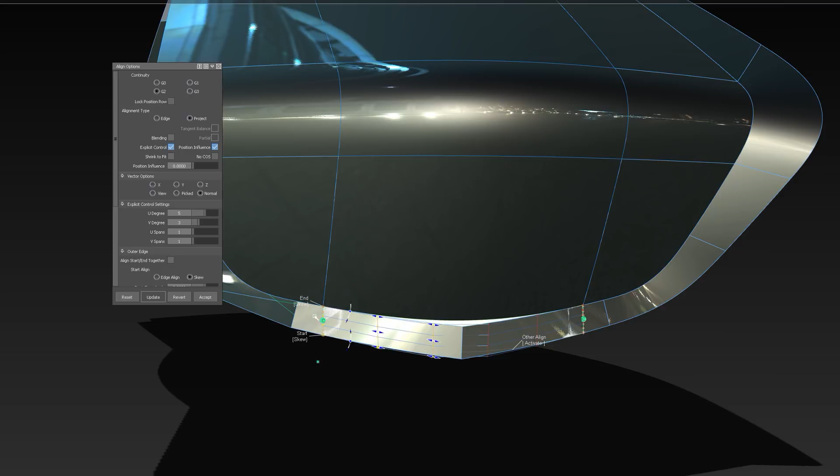Here I just start doing the transitional surface already, and then I just project it to that window, and then I project it to the main surface, and that's how I get that little window bezel, I guess.

In automotive terms, that is called the DLO. That's like that window opening on the side.

And now I am gonna do the main fillets in the middle, and I want to use my fillet tool, and I can't because I only have half. So what I do is I duplicate those surfaces so that I can use my fillet tool. And remember to save.

In these videos, every time I'm recording it, I gotta save more often. But I try to save as often as possible.

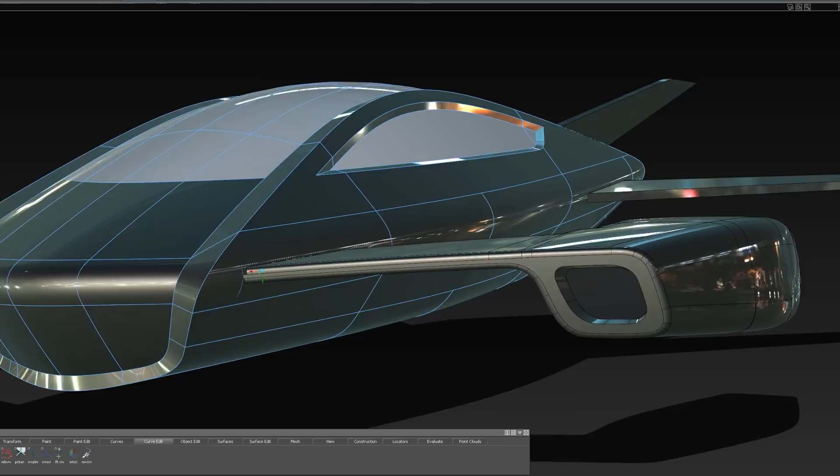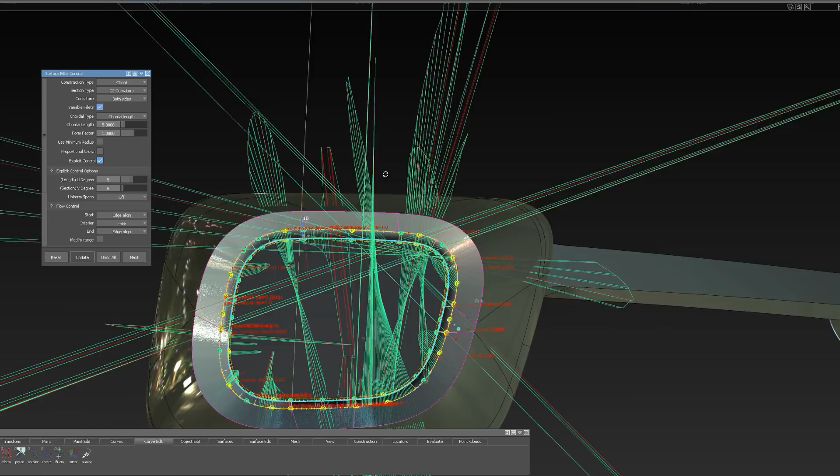And if you could see here, this is very much simple surfacing, but it talks about a lot of the rules that you always tend to follow. What I'm doing right now is more secondary or tertiary surfaces. So I wait until everything else is done, and then I do the ones that are all in the middle, and then all you have to do is curvature with the collinear option, and there you get a nice little corner, nice and clean.

Same thing here. I push it back, align, and because it's kind of the same size as the other one, instead of filleting it, I rather move them back and surface them. It gives you a nice little clean front end.

And then once I paint that, from here I skin these, project a line to one of the edges, the other edge too, and I think that's about it for the middle surfaces.

So I think from here I could delete. I know that I can delete the edges now that I don't need those duplicates I did, and then I'm gonna project and trim that middle. You could also detach it in the middle, but at this point I felt like I could just project and trim. It would be a little quicker, and I might need that later.

I don't know. And see, now it really starts looking nice, and all that is just based off those really simple curve networks that we did in the beginning. Nothing too crazy.

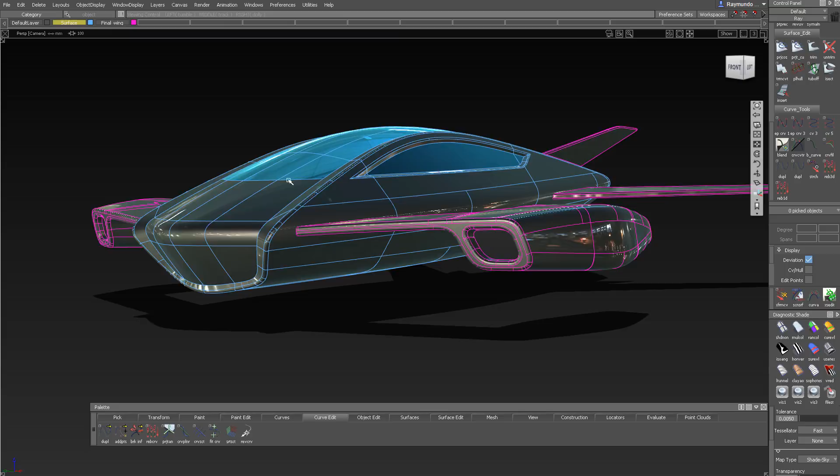So I always try to end these videos as I do these fillets. I'd rather talk about what the lessons were that I was trying to teach you guys, because like we said in part 1, it wasn't so much the tool I used, it was more about the foundation of the base. If you see that hood I did, the canopy, all of those different ways that I did those, the result was exactly the same, because the fundamentals of the volumes were the same.

And if you see the hard edge model of this spaceship versus where it is now with all the smooth secondary surfaces, all of those are secondary, as in they're based off the primaries. And so the actual design of this spaceship came out in that first blocky cube. The rest was just me choosing the size of the transitions and the look of the surfacing.

That's the whole point of this video. Make sure that your structure is as solid as possible, because that is where your design comes from.

A lot of times I see people first design the headlight, and then try to extrapolate the hood from that. I remember one guy told me he was an expert in Alias, sending me emails, and his model was just the front end of a headlight, a corner. It wasn't really that good, but it made me see what level he was at, because how are you going to do a headlight if you don't have the surrounding volumes around it? How am I going to do DLO when I don't have a nice surface to work with? If you follow a good structure, everything else just falls into place.